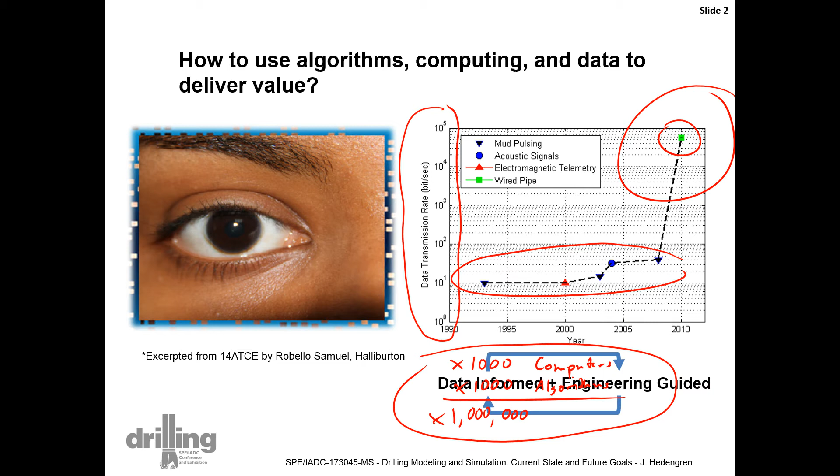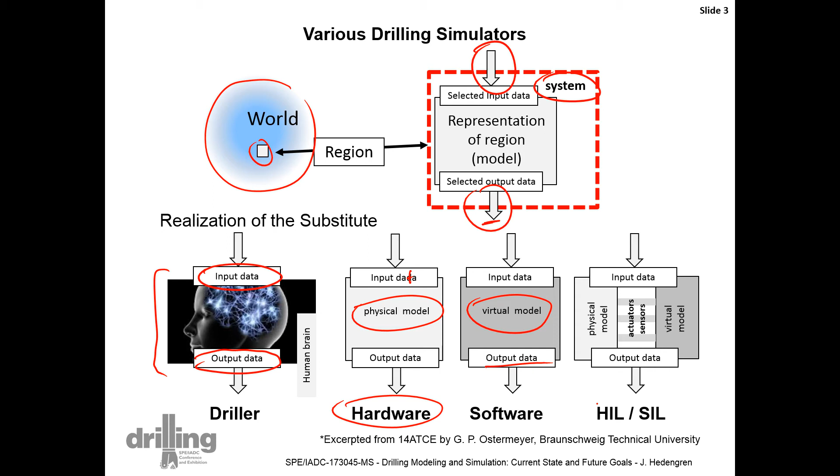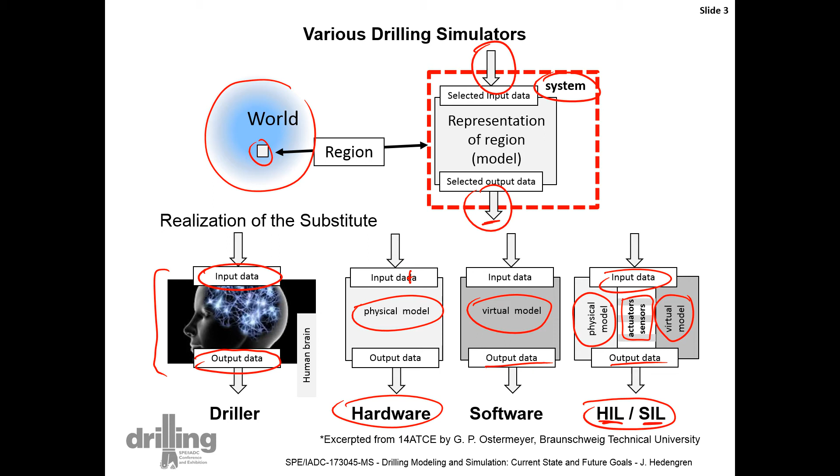We may also have a combined hardware-in-the-loop or software-in-the-loop system, where we combine input data with parts represented by a physical model, parts represented by a virtual model, and parts that can sense or actuate, providing additional data for these two models, and then produce the output. So there's a variety of simulators we can use to approximate or understand our world.

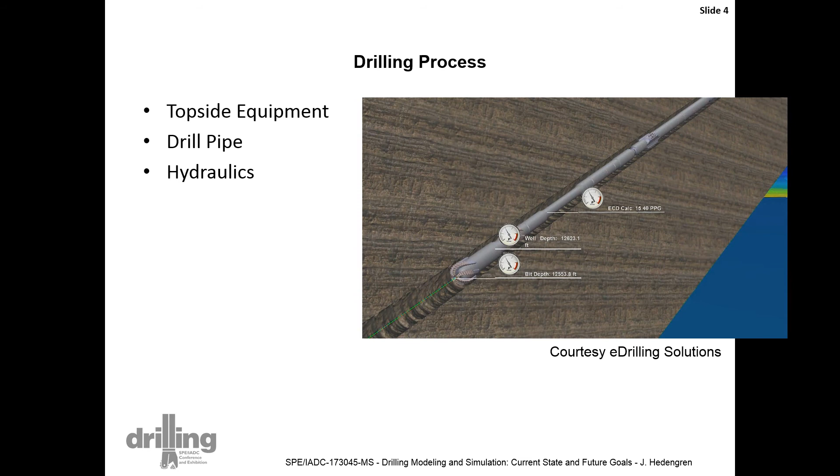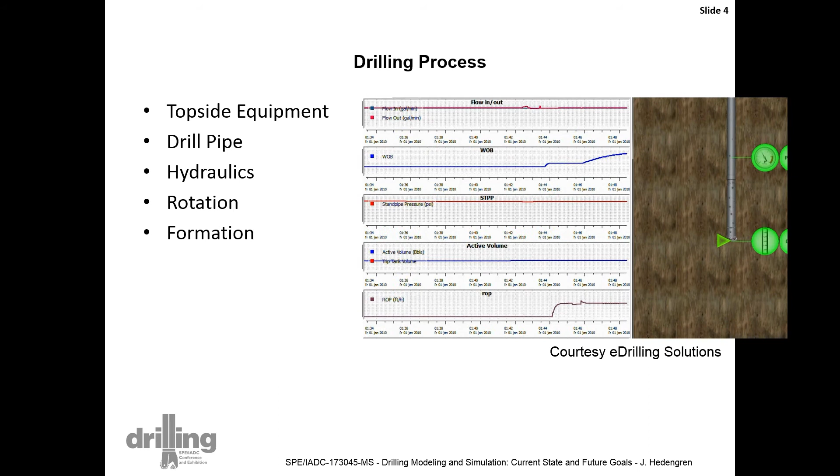Okay, so let's talk about the drilling process. There's topside equipment, drill pipe that we're concerned about, hydraulics, the flow of fluid down through the drill string and out through the borehole. And then we also have rotation that we're concerned about, the formation, what we're drilling into, and hole cleaning.

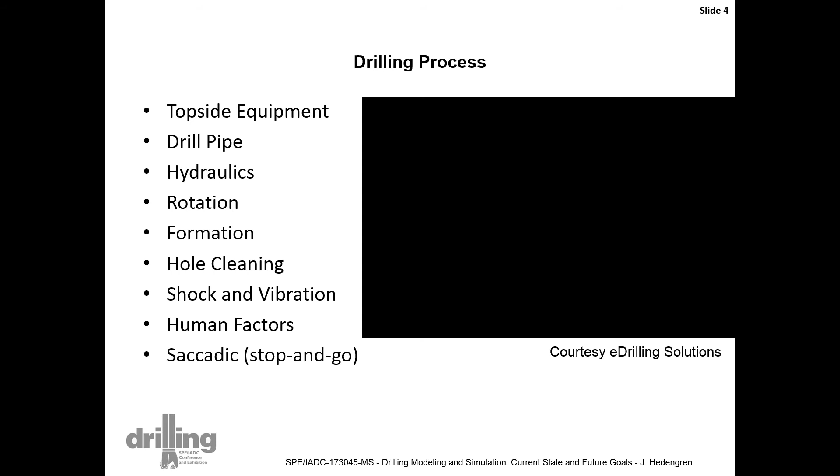So, can we drill faster, and what is stopping us from doing that? It might be too high a concentration of cuttings, shock and vibration. Human factors are important in modeling, and it's inherently saccadic, stop and go. That's another challenge in drilling. There's also discrete phases of operation, all leading to challenges for modeling the drilling process.

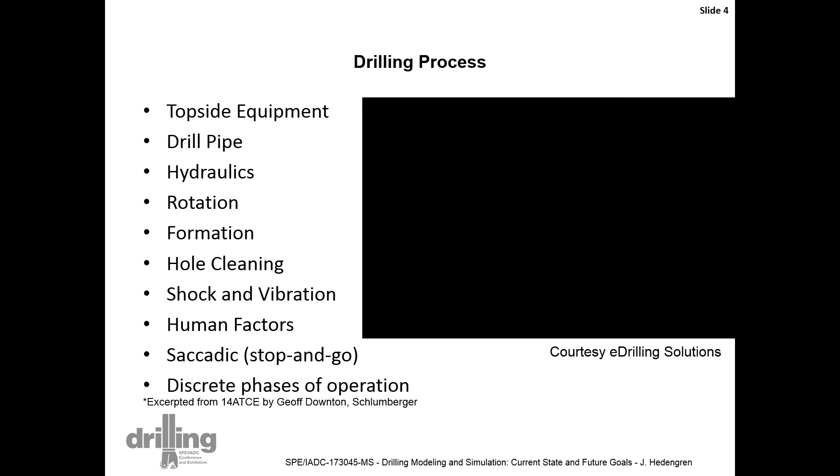Okay, so let's talk a bit about drill string dynamics. They're a major cause of bit and bottom hole assembly damage and reduced drilling performance. One particular company reported in 2012 that shock and vibration accounted for hundreds of millions of dollars, or a quarter of their total loss. So this is a big area to work on.

We want to be able to develop this further. In the 80s, researchers developed finite element-based dynamics, and recent progress has been in nonlinear development, hydraulic effects, thermal effects, and arbitrary buckling and snaking.

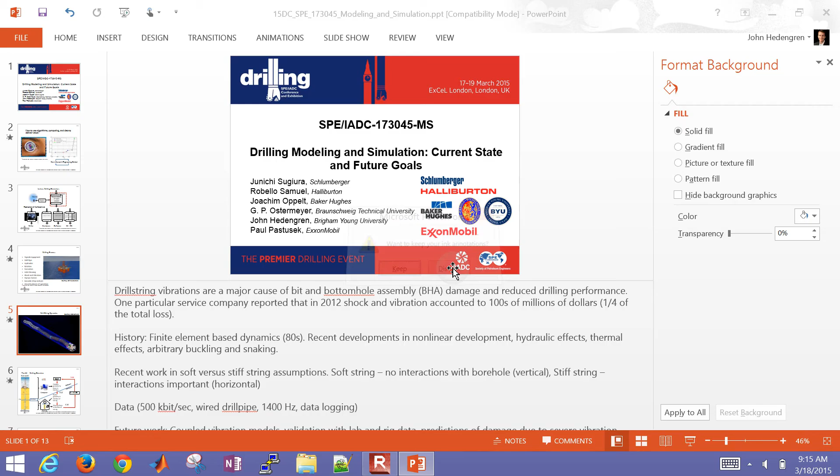We've also had recent work in soft versus stiff string assumptions. Soft string being no interactions with the borehole when it's considered vertical, and stiff string is when there is interaction with the borehole, typically in horizontal sections.

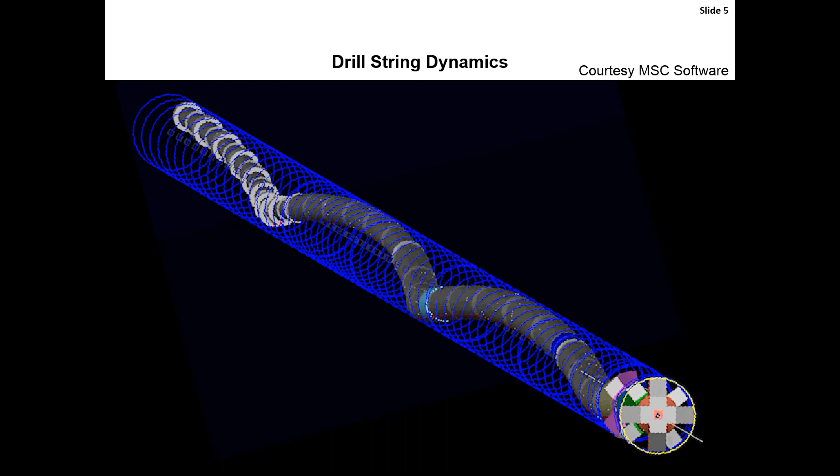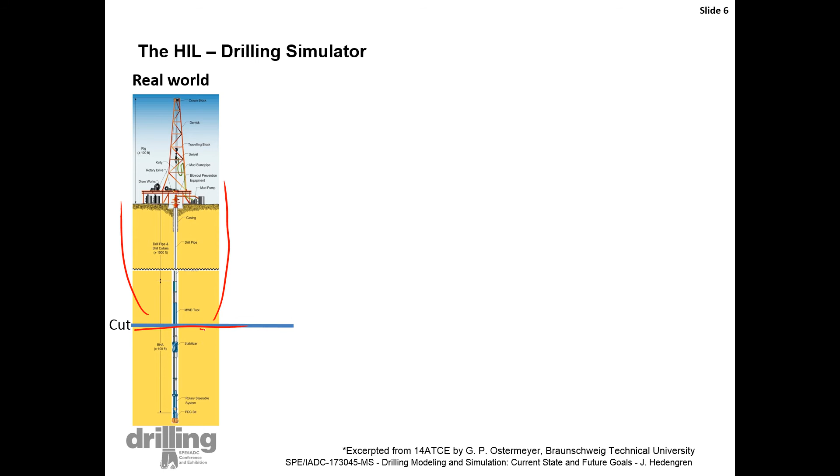So this is a procedure for simulating at time t. Let's say the start of time, we have complex geometry forces at the interface, just giving it initial conditions, but also this complex geometry. We first of all simulate...

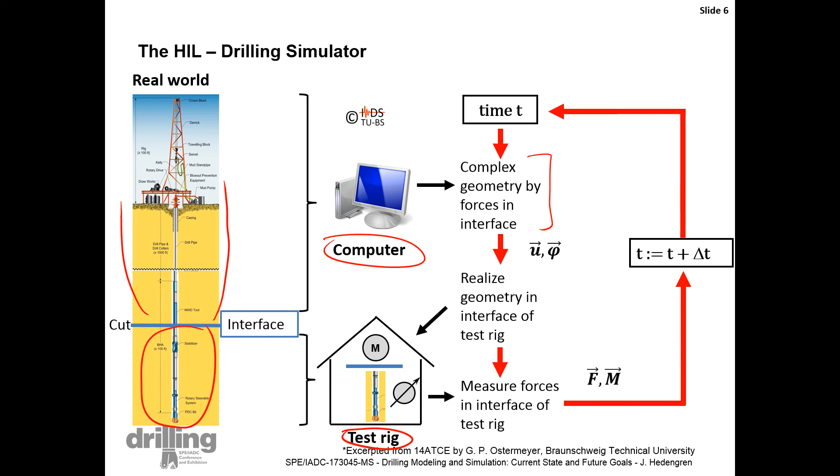And at the boundary, what needs to take place, we give those inputs to the boundary of the physical model. We measure the forces that result from the input-output relationship of the physical model, and feed that information back to the simulation model. Then we step to the next time, increment by a certain amount, and return to the simulation model, down to the physical model again, creating a loop between the software and the hardware.

We have this hardware-in-the-loop simulator, and one reason we might want to do this is if something would be too difficult to obtain with software, or not realistic enough, or there are certain vibration frequencies too high resolution to model digitally. With hardware in the loop, you can split things in different ways, replacing certain parts with software or hardware.

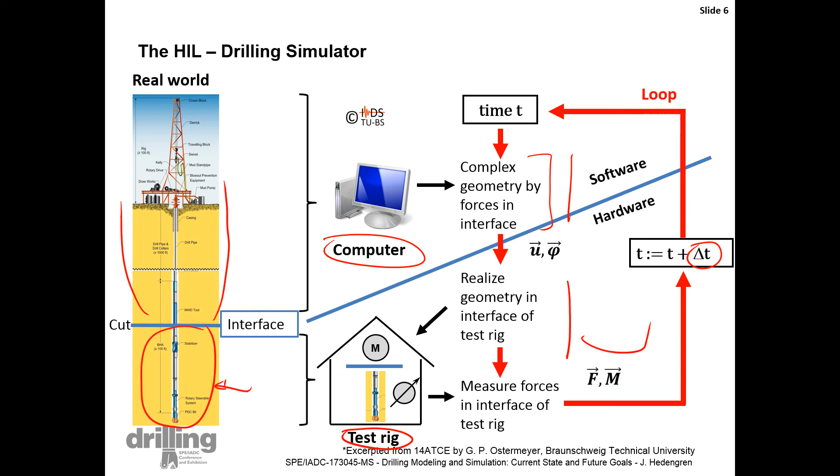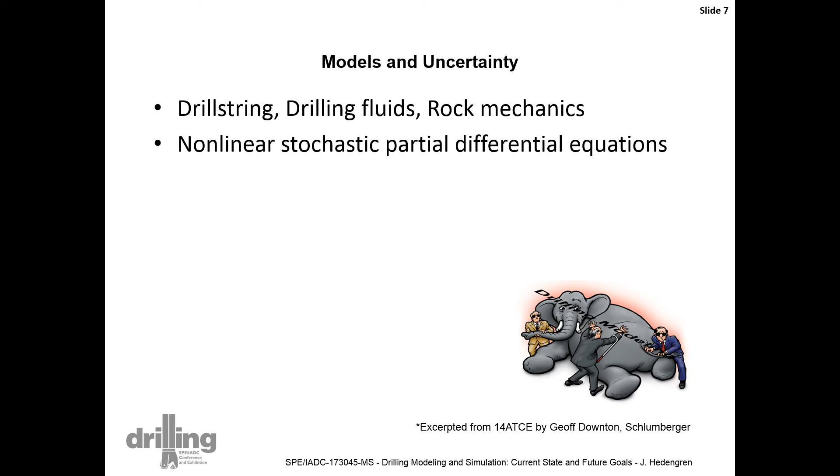Okay, so let's talk about uncertainty, because this is important when considering the drill string, drilling fluids, rock mechanics, etc. We combine that with nonlinear stochastic partial differential equations—very sophisticated equations, maybe finite element methods to discretize. Some of the things we're concerned about are uncertain and nonlinear, maybe conditional and moving boundary conditions. We may also have spatially distributed systems and large energy stores.

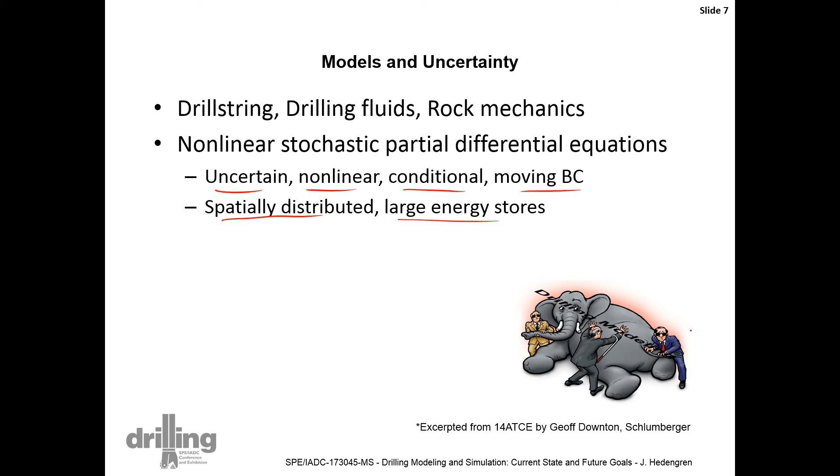As we think about each of these things, it's like these three blind men exploring the elephant, and each one sees different aspects of this elephant, and they're trying to put this together. How do you do that? How do you couple these models with so much uncertainty about each of these individual elements?

You also have, for example, downhole measurement delays. How do you reconcile that? If you don't have high-speed telemetry, how do you deal with time average data or other effects of measurement delays, or slow data transfer? Also, you're controlled from the surface, but you're inherently trying to control things that are kilometers down this string.

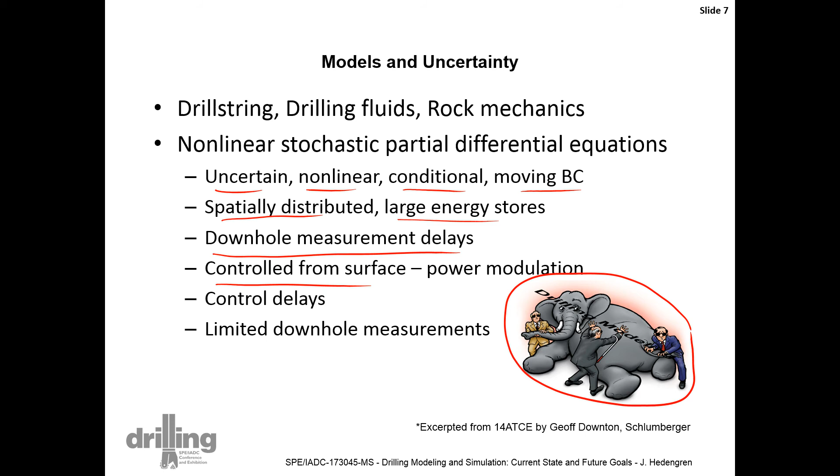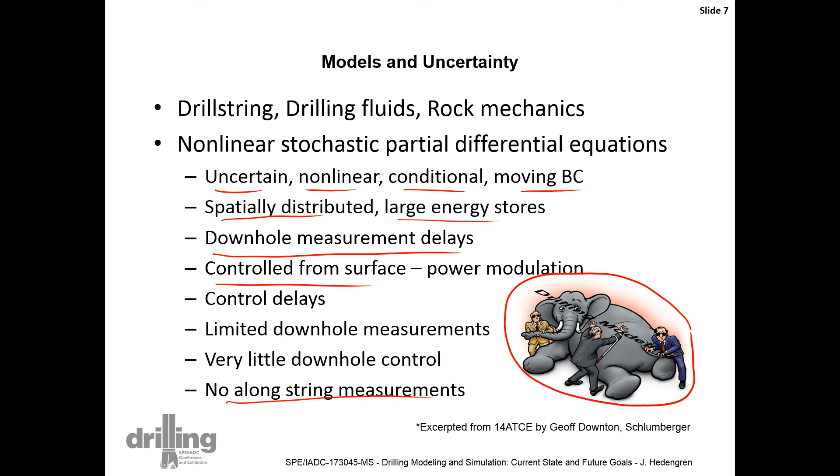That's just another challenge with uncertainty, control delays, actuation delays, and then you also oftentimes have limited downhole measurements, and also very little downhole control. When we don't have along string measurements as well, sometimes we're in the dark about what's actually happening. We have a mathematical model, but we may not have a complete understanding of what's actually happening.

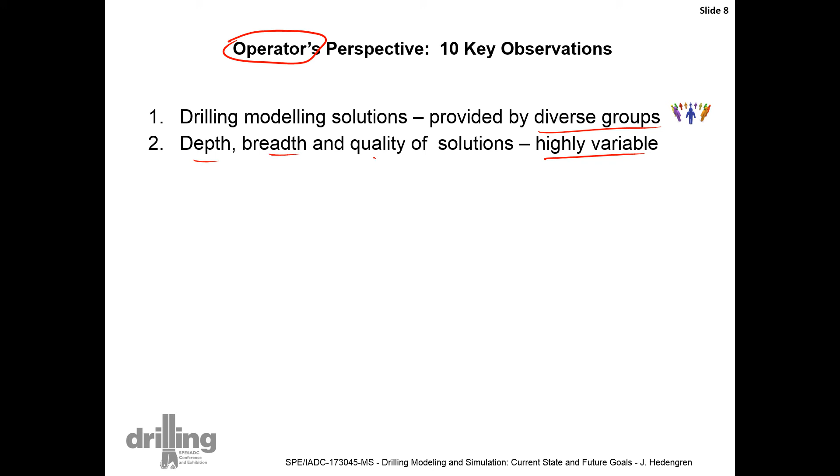Let me go over a couple key observations. This is a perspective from an operator. Key observations are that drilling modeling solutions are provided by diverse groups, and as an end user, there are many different options and backgrounds from these groups that you could potentially acquire some of these models. So there's very high variability in the depth, breadth, and quality of solutions coming from these diverse groups.

So there's a lot of time spent trying to quantify the performance and perhaps benchmarks to be able to judge each of these different vendor solutions.

Validation is seen as a common area of weakness. How do you tell if the model has been validated? Was it validated with data? Was it validated with other simulators? What's the validation process, and is that documented?

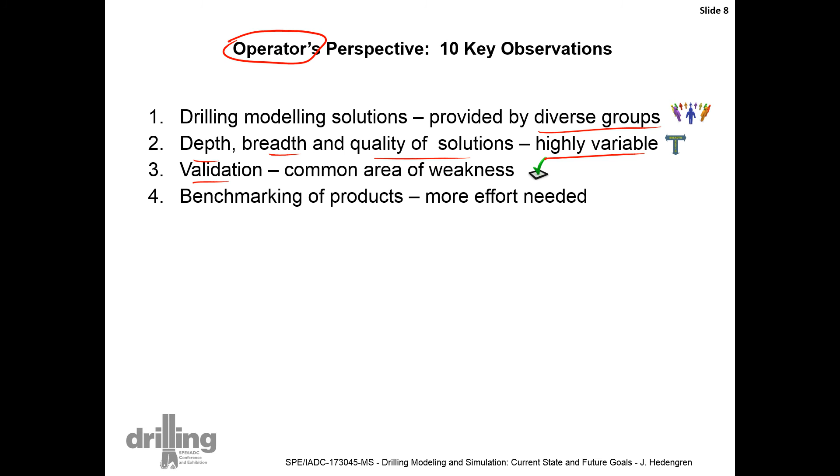Benchmarking of products was identified as an area where more effort is needed. In the case of reservoir simulation, for example, SPE has put together a number of benchmark reservoirs to which reservoir simulators can be judged, and all of the different vendors will simulate on these reservoir simulation standards, and this provides a benchmark to say how consistent and how accurate these simulators are.

Certification. Is this needed for drilling solutions, especially with liabilities in this area? Is certification needed for these drilling solutions?

Model limitations and assumptions are often not understood, and one of the reasons for this is that there are proprietary models, and sometimes the vendors are not willing to share some of the details, limitations and assumptions. If there are severe assumptions or limitations, sometimes they don't want to necessarily tell the full details because of marketing reasons, for example.

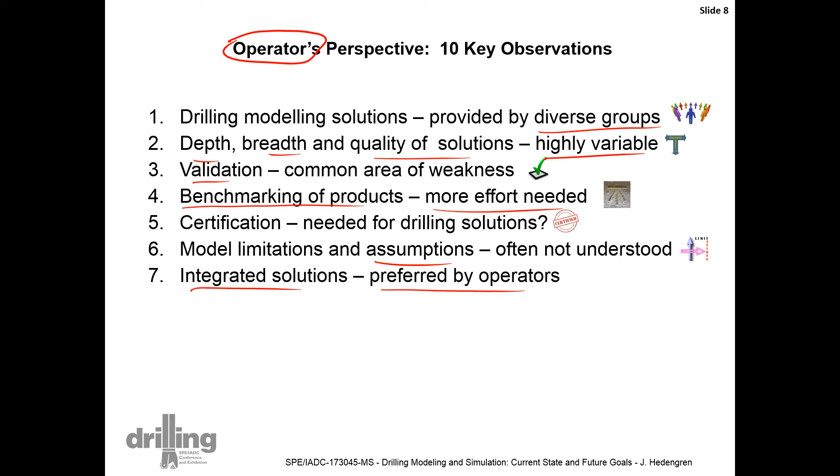Integrated solutions are obviously preferred by operators, but it can be difficult sometimes to integrate different specialized software together to fulfill an overall larger objective.

You also have niche applications used that have technical edge, so very specific applications.

And fit for purpose training. This can be challenging, especially with turnover in organizations, shifting roles and responsibilities. How do you train and get operators to a very high level on these training simulators? This can be a challenge.

And then you also have technical specialists. These are going to be key to maintaining product efficacy. You see in organizations that there are key individuals who need to fulfill that role, because this isn't just the software, it's software plus people that deliver solutions.

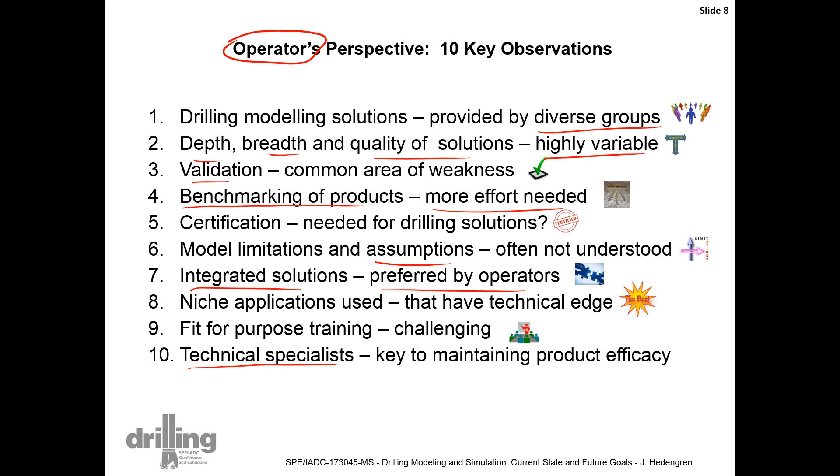So let's just talk about a couple future opportunities. We've talked about some of the perspectives where there are gaps from an operator's perspective. Software certification would certainly be one of them, something that's verified and validated. This is a long list, so let me just go over a couple of these.

You might have improved input safeguards, so data validation. How do you deal with data that might be sparse or corrupted, outliers, noise, drift? This is a common thing we've heard from many operators, that sometimes the data isn't good enough for some of these advanced techniques we want to implement in real time, for example. So the data quality needs to really be addressed.

And this is a major focus for the DSATS committee, the automation committee within SPE that is taking a look at this particular thing with data quality.

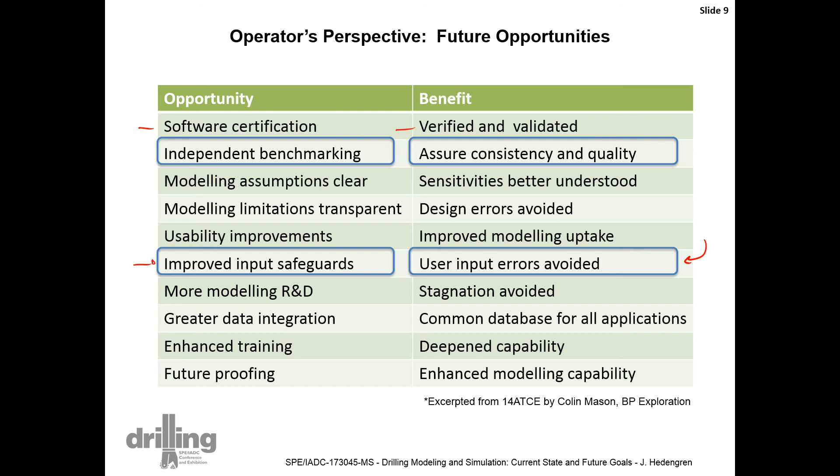Okay, so let me go over another one: independent benchmarking. We've talked a little bit about that. The SPE reservoir models - does there need to be something similar for drill string dynamics or hydraulic models? Is there an independent benchmark that would give the same assumptions and data to see how these different simulators perform?

Okay, and then enhanced training. This is a big deal as well, to deepen the capability to use these simulators to the highest level of capability.

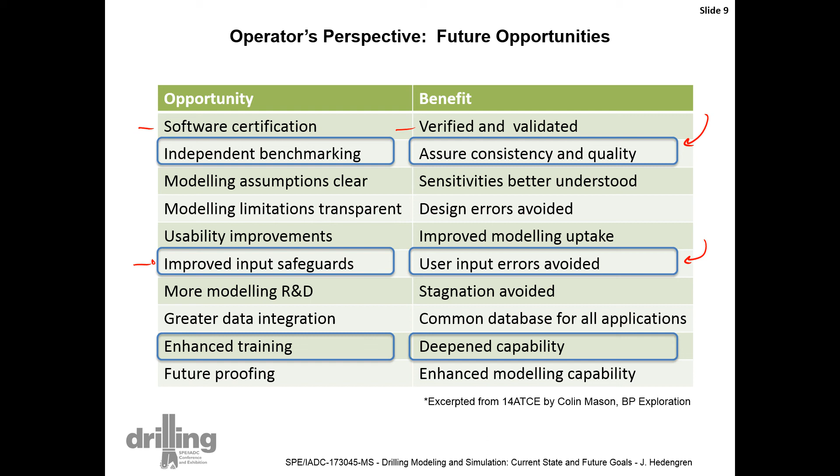Okay, so let's talk about this drilling modeling and simulation discussion session. We had this at the ATCE meeting in Amsterdam, and many of the co-authors on this paper were on this panel.

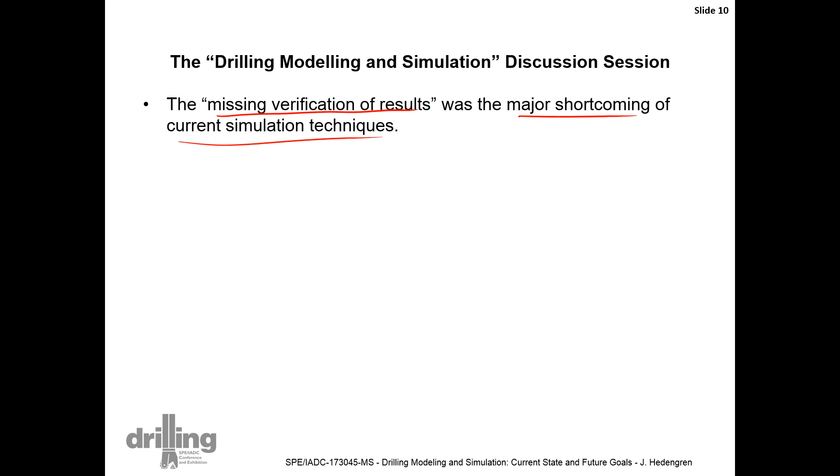Some of the main points brought up from this are that there is a missing verification of results - that's a major shortcoming of the current simulation techniques. They produce results, but how do we know the confidence in those predictions? Then we also have diversity of methods and a missing common industry approach in drilling modeling and simulation.

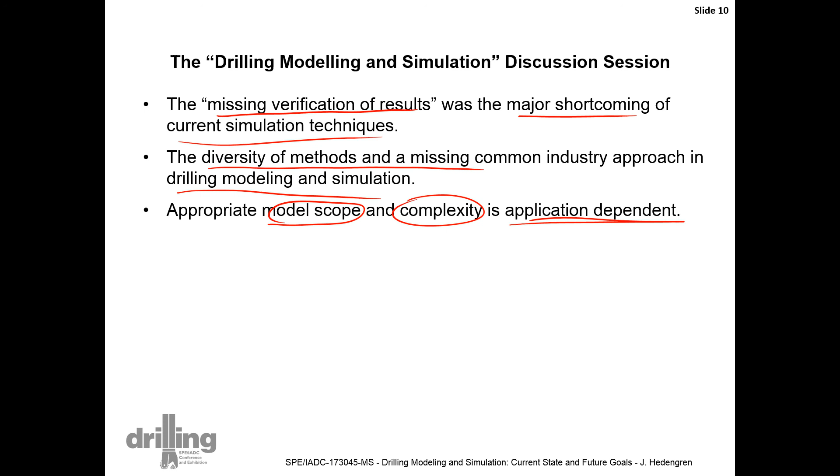Okay, we also want to define the model scope and complexity, and this is going to be very application dependent. There are going to be some finite element simulators, for example, that are going to be very good at describing bottom hole assembly performance.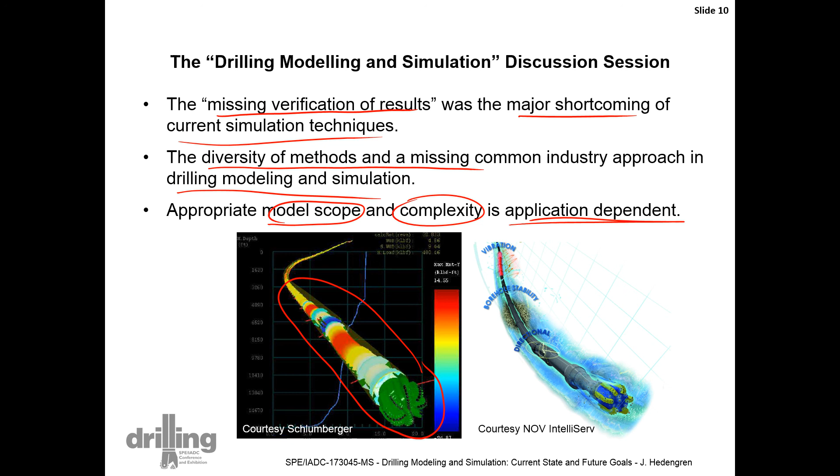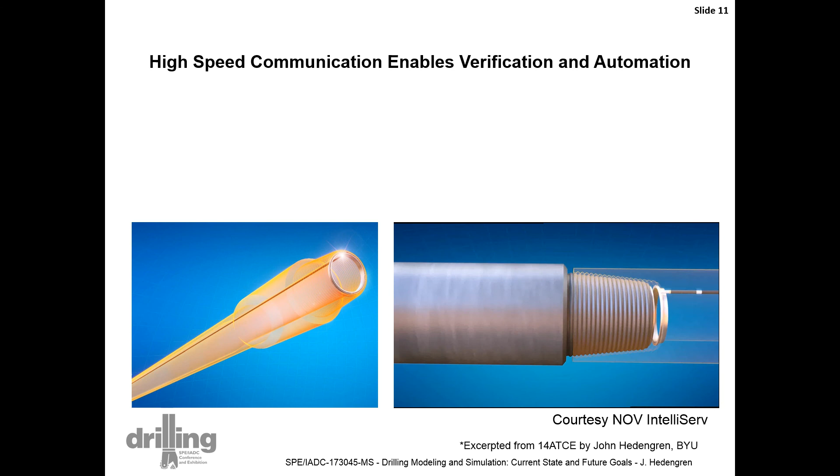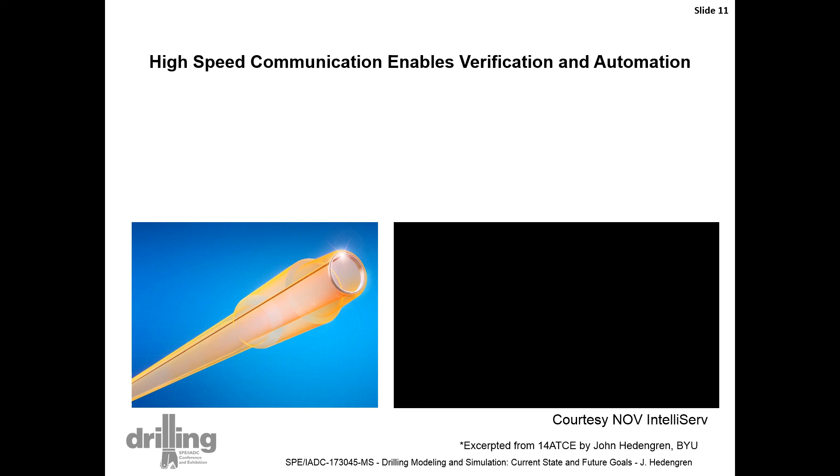So one of the other points brought up is that high-speed communication is really going to be a step forward in terms of verifying these models, and also in automation. You can see that as the drill pipe are connected, there's an inductive coupling that allows a continuation of this coaxial cable to downhole measurements, and also provides two-way communication.

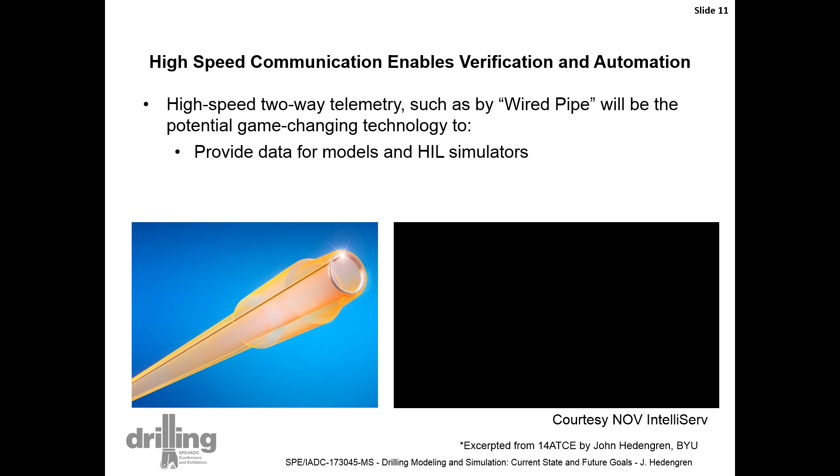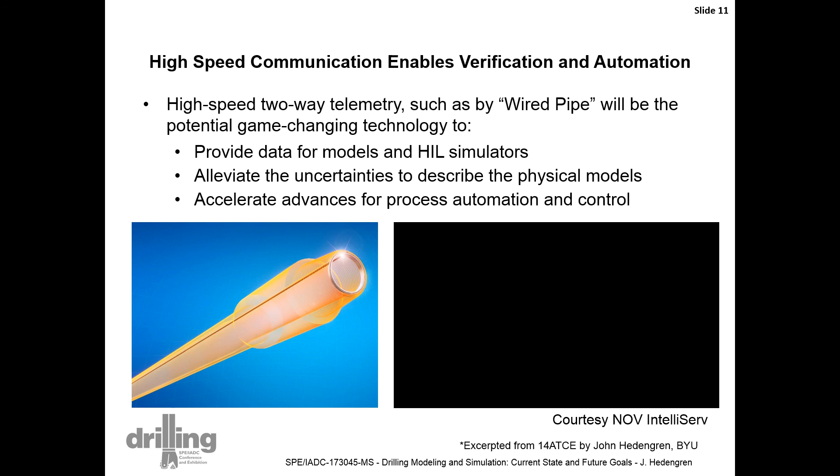Okay, so this is going to be potentially a game-changing technology to provide data for models and maybe hardware-in-the-loop simulators as well. It could also alleviate some of the uncertainties that have been plaguing these models, and accelerate advances for process automation and control. So let me go over a couple of the conclusions from this.

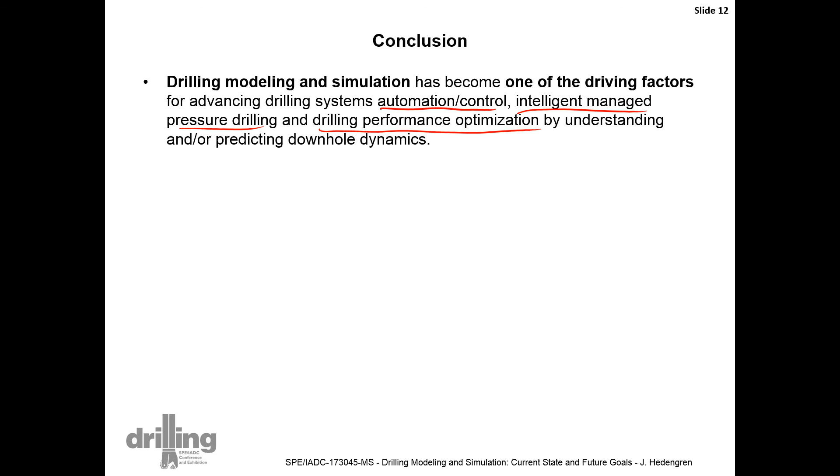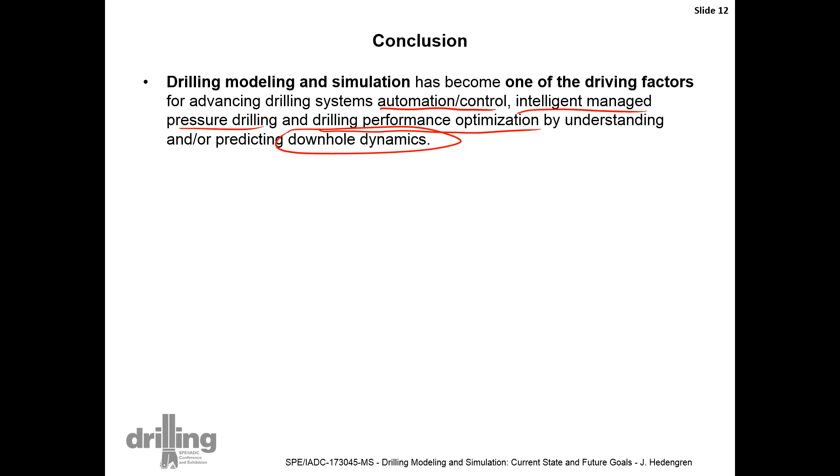Drilling modeling and simulation has become one of the driving factors for advancing automation and control, intelligent managed pressure drilling, and drilling performance optimization. Some of the areas where we've been able to make really significant progress in the last couple of years are, for example, downhole dynamics, hydraulics modeling, and some topside equipment modeling as well.

Okay, so this high-speed, two-way communication and along-string sensors are going to enable these models and simulators to be validated, and also drilling automation systems are going to emerge that really utilize this intersection of increased computing, improvements in algorithms, and improvements in data transmission rates.

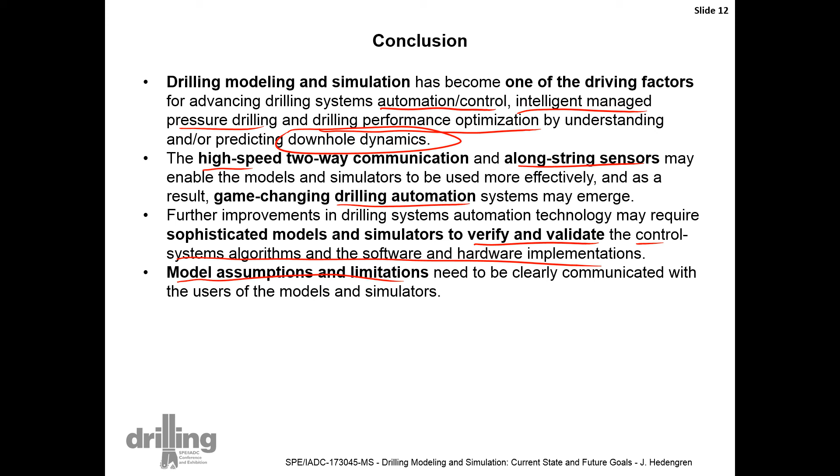So we're going to see that we need to verify and validate these models, and that's going to be increasingly important as we use these for critical decision-making tasks. And then also, from the operator's perspective, the modeling assumptions and limitations need to be clearly communicated to the users.

There's also a need for the integration of models. There are so many specialty or specific application models, but just like the elephant, we want to try to put those together into something that may have some benefit for a larger scope, where there's some cause and effect relationship between different models that can be exploited to deliver additional value.

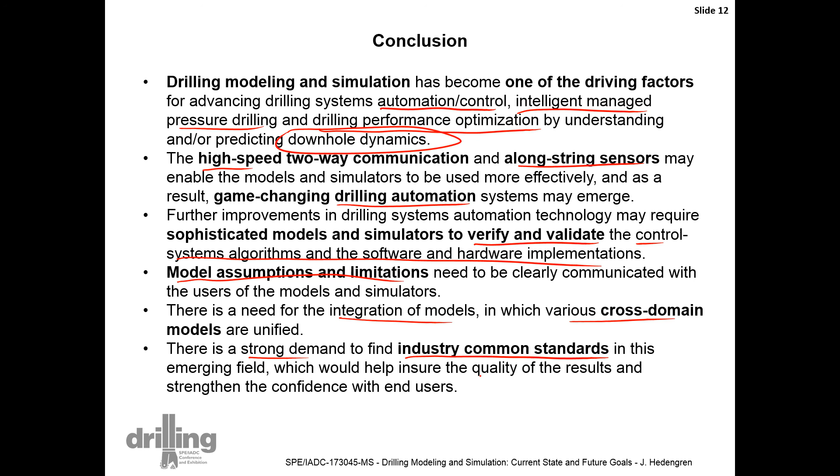Okay, and then there's also a strong demand to find some industry common standards, which could help ensure the quality of the results and strengthen the confidence with end users.